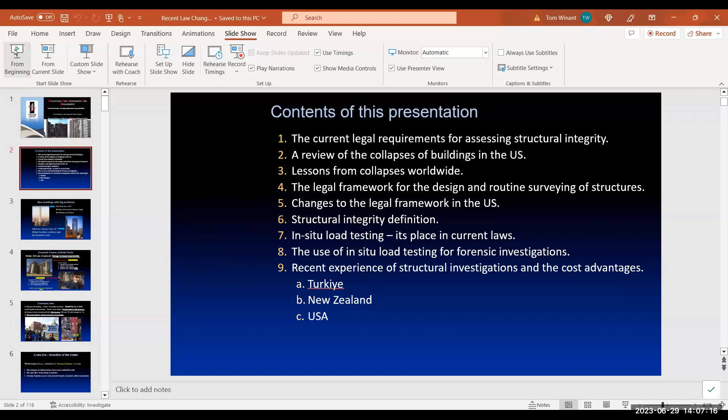So anyway, that's the pretext of what we're about to speak here. So the contents of this are the legal requirements for assessing structural integrity - structural integrity being the operative word that has just entered our discussion around the country, but it's always been in ASCE 7. Review of the collapse of buildings in the US, which just recently happened. Lessons from collapses worldwide. The legal framework, changes to the legal framework, structural integrity definition, in situ load testing, and the use of in situ load testing for forensic investigations, and the recent experience of structural investigations. So we've got a lot of slides to cover, and I'm going to try to move quickly through the first 20 to give it to Dr. Geary, and hopefully we can get through them all, because there's a lot here with examples at the end. So I hope you all tune in.

So some of the new buildings that have big problems - these are two that you're all probably familiar with. 432 Park is a building in New York City, and it was not commissioned. All of these buildings, if they had a load test, we'd understand how they perform dynamically, but it has some major structural problems that led to flooding on 8 floors. So this is the type of reason why doing this sort of commissioning and this load test when a building is first built makes a lot of sense. It's part of a big lawsuit now, and it's going to be very expensive for the engineer, for everybody.

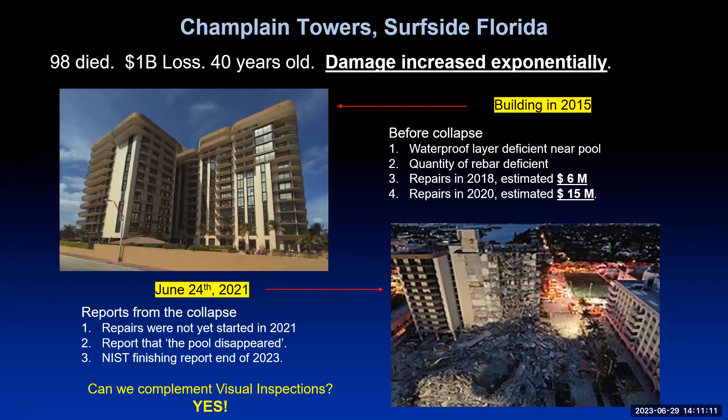Understanding its risk is the first step. But right now, we're not doing this. And for this building, I think we could have helped with that. These methods are definitely going to be able to help with understanding risk and mitigating it.

Another recent failure, a 100-year-old building in Iowa, 3 people died, 1 woman lost both legs, a tragedy. Everybody is homeless now who lived in that building. New York City has 200,000 to 300,000 5-story walk-ups similar to this, certainly in design, maybe not as big, but they have them all over the place.

This one had significant deterioration. It was bought in 2019, had failing bricks. They painted it to make it look better. Well, isn't that familiar? That doesn't fix it, it just paints over it. So we're hiding problems, we're not understanding them.

They had a wind event in 2020 in Iowa. Very strange, right? So they had a derecho with maximum winds of 126 miles an hour, 70 miles an hour on average for a whole hour. So it was weak to begin with, and then it started showing real signs of damage.

So this is a wake-up call in that when you have a structure that's compromised, whether it's in Iowa or down in Florida, if you're seeing signs of damage, you can measure this and then you can track it. Right now, we're guessing as a society, and that's not a good idea.

So now we have a change in law. Structural integrity became the operative words. So what that definition is, Dr. Giri is going to go into, but it includes lateral capacity and making sure it's tied together. Understanding what that capacity is and verifying the mode shapes gives an understanding of this.

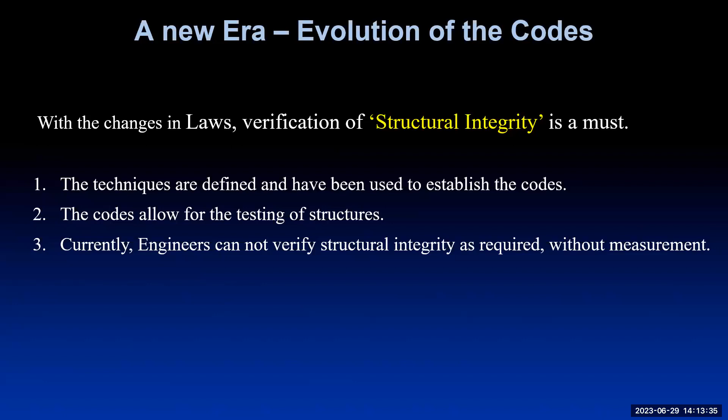Most buildings have all of the structural elements covered. So now an engineer's got to walk through that. He's got to stamp a letter, or a report that says, I have verified this and it has structural integrity. And that is a big leap from doing a visual inspection. And the fact that the law has now focused on this in multiple states and federally, it is a change in the standard of care.

So the Florida law was the original version of this. Vertical elements of the lateral force resisting system have suffered damage such that the lateral load carrying capacity of any story, in any horizontal direction, has been reduced by more than 33%. So this is a quantification of how much damage is allowable.

And so now, don't you need to measure it? The capacity of any vertical component reduced by 20% from its preceding, pre-damaged condition.

So we have these metrics that give you an idea of why you need to measure them. They give a definition of substantial damage: a condition where vertical elements of the lateral force resisting system have suffered damage such that the lateral load carrying capacity in any story in any horizontal direction has been reduced by 33%, and the capacity in any vertical component has been reduced by more than 20% from its pre-damage condition, with remaining capacity of such affected elements with respect to all dead loads and live loads less than 75% of that required by the code.

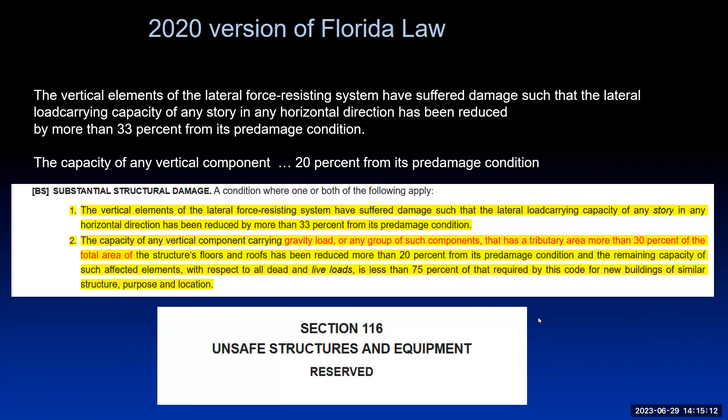So we have performance metrics here, and performance metrics are not uncommon, and that's exactly what we need to understand, that there's a way to measure performance.

So a year of legal changes. 2023 has looked for the verification of structural integrity. The Florida law is actually Senate Bill 154, signed on the 13th of June. New Jersey has Senate Bill 2760. Jersey City passed an ordinance. Westchester County was working on language. And this is really an important one: Freddie Mac and Fannie Mae put guidelines in referencing structural integrity.

So it's in chapter 1 of the code. It's now in these different states and their legal definitions, and now it's done on a federal level. It really is a national issue.

So Senate Bill 154, signed June 13th, provides for inspection guidelines and implementation. They did a study trying to support how to implement this, and they talked about non-destructive testing. The draft report references the method we're talking about here as a way to do a load test on a structure to verify structural integrity. So it's now in the process.

They also have reserves for repairs, and that's really important. Now people have money to pay for things like testing and repairs. Over the last 40 years, as this was evolving, a lot of community boards could opt out of putting money into reserve. Now they didn't have money to fix things and they made bad decisions, so they're dealing with a game of catch up, and they're seeing exponential degradation.

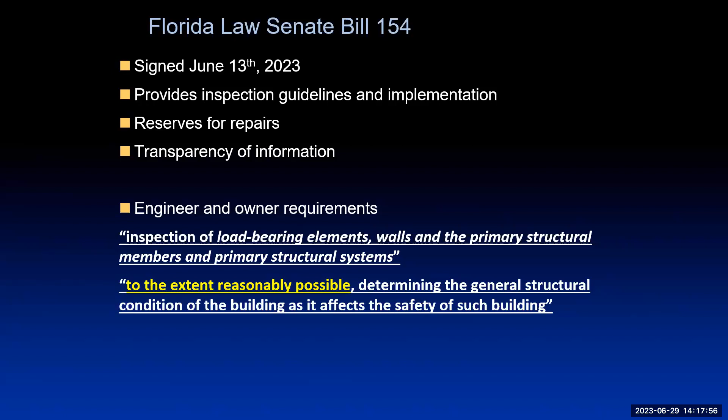These are items number 1 and 2 in the law as it comes to the inspection process. So we need to understand the structural system, and this puts the onus right on the engineer, and the responsibility on the owner to have this done effectively. So they really do need to take this seriously.

So the legislature finds this is about structural integrity. The legislature finds that maintaining the structural integrity of the building throughout its service life is of paramount importance, in order to ensure that buildings are structurally sound so as to not pose a threat to the public health, safety, and welfare.

And then they have a statewide inspection program, and this is for condominiums 3 stories and above. They've defined the terms, they've defined the standards, and they've also defined the documents, codes and standards to use. So it's pretty much defined, and again, it's a change in the standard of care: a structural inspection of a building, including inspection of load-bearing elements, walls, and primary structural members and primary structural system, and to the extent reasonably possible, determining the general structural condition.

And then after the primary inspection, there's a phase 2 inspection. That phase 2 inspection means if something is unsatisfactory, if you have visible damage, then you have to go to a deeper dive. This is why they started really honing in on non-destructive testing, because you've got to quantify how things are degrading and you've got to quantify performance.

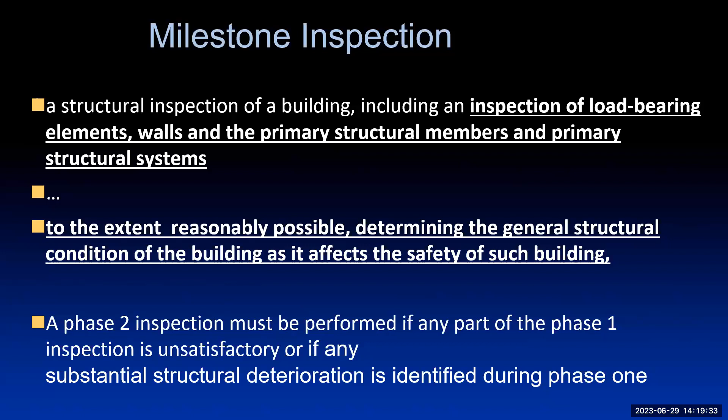So what is substantial structural deterioration? Substantial structural distress or substantial structural weakness that negatively affects a building's general structural condition and integrity.

In the lens from which we use, if you can measure it accurately, you understand how the building's performing. If you know what the code expects, then you know what it should be doing. And if you can track its degradation, you'll meet the intent of this. So this can all be done in a day.

It does not include surface imperfections such as cracks, distortions, sagging, deflections, misalignment, leaks.

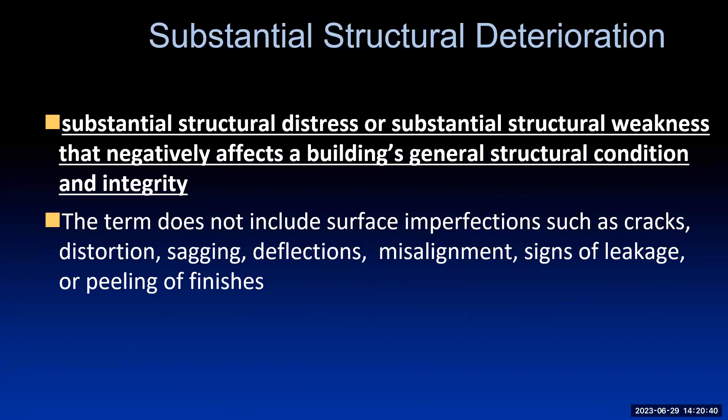Understanding structural distress can be done much more effectively with objective measurements than trying to assess it when a majority of it is covered up, and that includes the exterior. Most of them are stucco buildings. The concrete is covered with a thick layer of either paint or a stucco. So to be able to assess these effectively is important.

The phase 2 inspection report should indicate the manner and type of inspection, forming the basis for the report. Right now, it's mostly visual. Identify any substantial structural deterioration within a reasonable professional probability based on the scope of the inspection, describe the extent of such deterioration, and identify any recommended repairs.

State whether unsafe or dangerous conditions, as those terms are defined in the Florida Building Code, were observed. So this is an interesting one. If you can't see it, doesn't mean it's not there. So what's a reasonable thing to do? And you can't put disclaimers that I couldn't see it, so it wasn't there.

You're now responsible for verifying the structural function, the shear walls, and the structural connections of this. And they could be in distress and you wouldn't know it. So there's an inherent risk to the engineering community with this.

Recommend any remedial or preventative repairs for any items that are damaged but are not substantial structural deterioration. Identify and describe items requiring further inspection. So there's a series of things to do, and load testing actually gives you quite a lot of clearance to say that we've done everything reasonably possible.

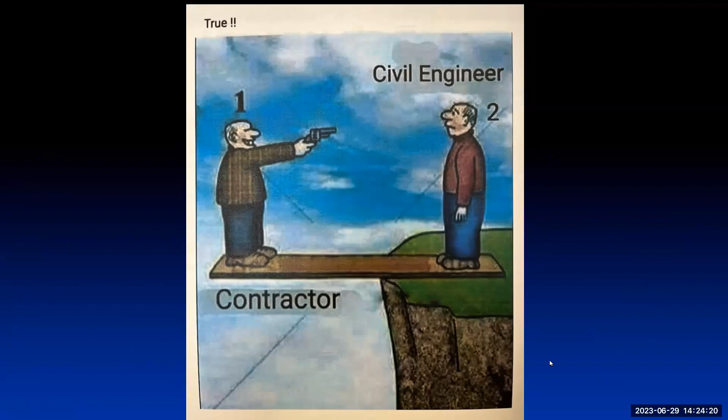Yep, stop sharing then, Tom. Okay. Thank you. And I will share my screen and we will go back to that same slide. And I'll take it from there. I think. Yeah.

Okay, so Tom has talked about a number of things in the definitions, particularly in that new Florida Code of Practice. Now, it's interesting to have a look at that and see what the exact legal state is, because they've been tinkering with their laws. As Tom pointed out, 2 years ago, they had a law which called up ASCE 7 as a standard which supported what they were saying. And it does. It's a good document. What they did find after the Champlain collapse was that it didn't cover the sorts of things that had led to the collapse.

And now we're actually finding that we've got a number of other things which are going on. So it was necessary for them to define what they were going to do, how often a structure could be inspected, how it was going to be inspected, and what the items were that a surveyor, an inspector, would actually be looking at.

We really want to bring to you the fact that structural integrity has become incredibly important, because you are now required to assess structural integrity. And how do you do that? Well, I'll be talking to you about some details, but the first thing is define it.

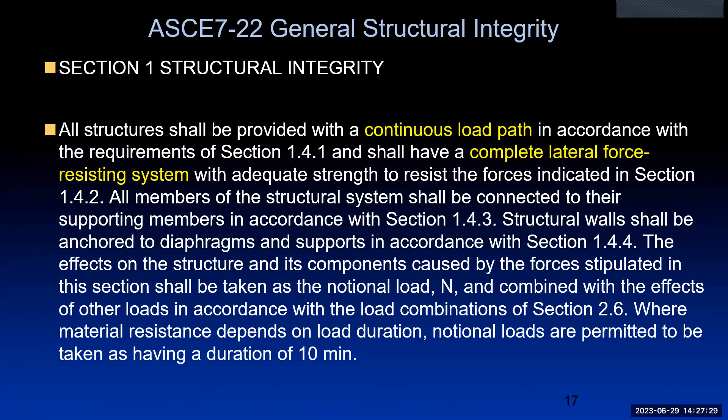And then they talk in a little bit more detail. You can read the detail at your leisure there.

Now, the important thing about structural integrity, though, is that it's been around for a long time. It's been called different names at times. In fact, way back in the United Kingdom, it was called structural adequacy. Why? Well, because of a collapse that there was in the UK, Ronan Point.

And I'll be talking in some detail about that, not just because it's an interesting subject, but because it is quoted in the International Building Code in the US, used in the US right now. It's right up there at the front of ASCE 7, and it provides details.

So essentially, it's the ability of an entire structure and its elements to carry imposed loads without distress. Now, there's something that we have to bear in mind as well: what is distress? And then it becomes a little bit more complex.

So on the big picture of loading, the imposed loads are those expected in the design process. The expected loads are risk-based.

Now, I have sat on code committees in Hong Kong, Australia, Brazil, and given information to Japan and the United States about what to expect.

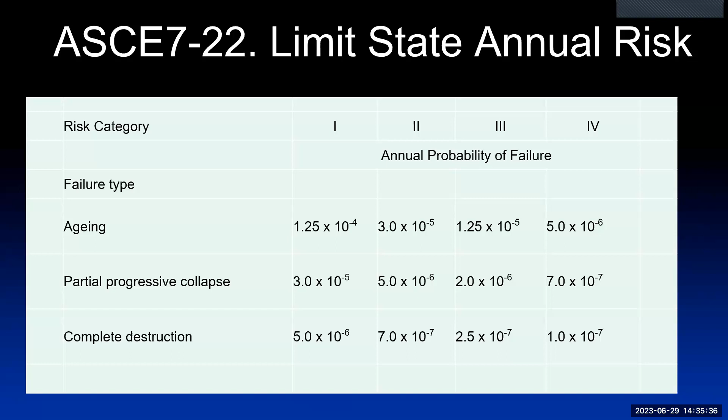That's what the medical profession calls a Six Sigma criterion. So in other words, for these types of failure, we're taking them into account in structural and civil engineering as well. But that does mean there's a secondary part to the design in which we must not just take the forces which are going to impinge on the structure, but we must look at the unexpected as well and reduce the probability of failure in those cases. I'll be saying more about this when I come back to talk about Ronan Point particularly.

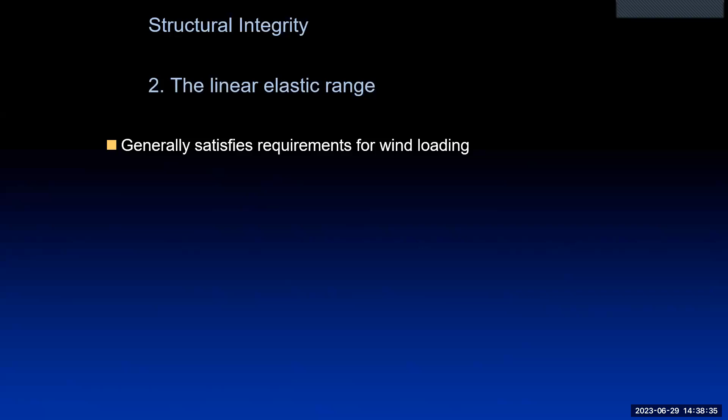The next is the linear elastic range, and generally speaking, we use that for wind loading. We use Newton's second law of motion: force equals mass times acceleration. This is the basis still of all our calculations that go into the design of structures. And since we're on the subject, in situ load tests belong in the same category. Force equals mass times acceleration is what drives it.

Sir Isaac Newton, in 1660, the Royal Society was formed amongst a number of people. Newton was one of the early fellows. You cannot just apply to join the Royal Society; you have to be invited. You have to have been right at the very top of your profession to be invited in the very first place. So a small group of people got together, and all of the things that we just assume are normal for us derived from people who were members of the Royal Society right at the start.

The basic saying of the Royal Society is, don't just take anybody's word for it. You need to verify using the scientific method about what's going on. And in situ load testing applies all these principles. It takes Newton's second law of motion, Young's modulus, Hooke's law, and puts it together with a verification which is scientifically okay.

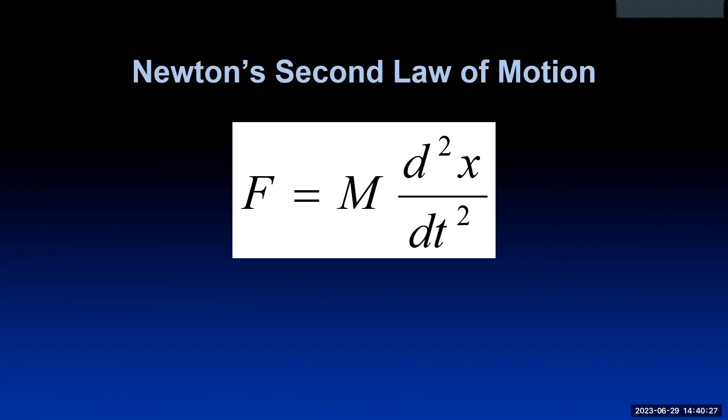So this is what we're talking about. If we look at a stress strain diagram, and extrapolate it to an entire structure, we have a force and a displacement. It's what stress and strain are, but on a very small amount, on individual elements. So we get an area which we call the linear elastic range, and we have a stiffness associated with that, which shows the ratio between displacement and force.

So if we're testing a structure, we measure displacement per unit force. Measuring force has always been a problem, but I'll show you how we get around that, and that in fact displacement per unit force is much easier to assess than the modal force. So we have this area where the stiffness is a constant until damage starts occurring.

This is pretty much the limit of wind design, although occasionally we get into some other areas here. And in seismic design, we go beyond the elastic limit and damage occurring in a structure, so that we don't do too much damage. It doesn't fall down, doesn't lose stiffness altogether. So structural integrity - we are interested in both ductility and earthquake response. And it's common practice in earthquake engineering to take this into account.

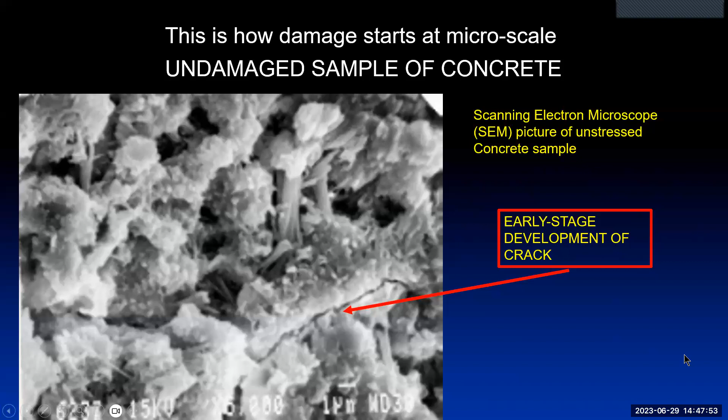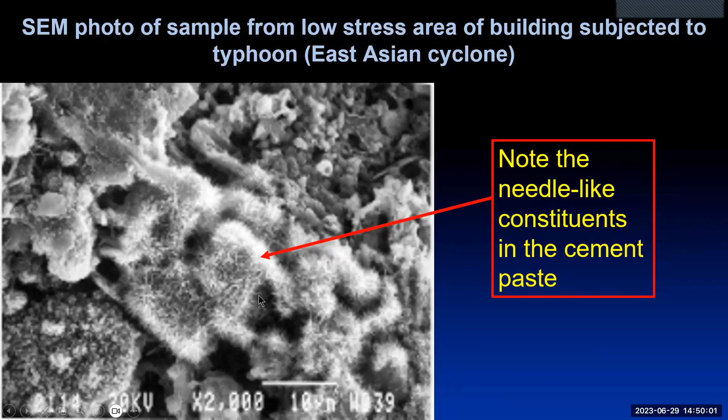And I'll come back to that with some more information. Now, the aging process - what causes damage in the first place? Well, I want to go back to our scanning electron microscope. Here we've looked at two samples, this one and one to follow. This one is taken from a low stress area of a building subjected to a typhoon - the East Asian approach to cyclones occurring, the same meteorological event, but somewhat different. Now you see in the cement paste there are different chemicals which form different areas inside the material here, and you can see needle-like elements inside the paste.

Taken from a high stress area, we find this. Now remember, it's come from the same building. They took their cement from the same supplier, and they were at slightly different times, but essentially they were the same category of cement which was put in. And since these measurements were made probably 10 years after the building was put up, there's no real difference because of the timing of pouring the concrete in the first place. So the needles are broken, and when we actually looked at the chemical constitution of this cement paste, we found enormous differences between the two. So in other words, damage occurs not just because of cracking developing, but also right the way up to small chemical changes within the material.

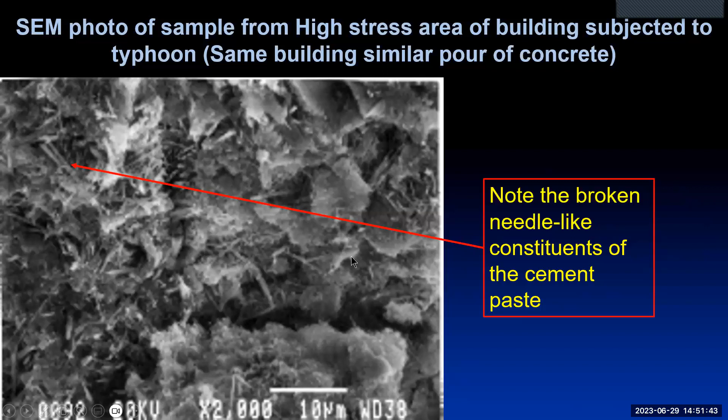Now, we were particularly interested in concrete at that time in Hong Kong, which is where it happened. We were also interested in steel, and laboratory experiments showed that there are similar changes in steel. Not the same, but similar - that in fact the loss of stiffness, the change of materials inside the steel were very similar to what occurs in cement.

Now, we've got a problem at the moment. Buildings are falling down. We have aging infrastructure inside the United States. How did it start? What was going on? Well, it started with this, Ronan Point in England. This was a 22-story building, and there was a gas explosion up on the 18th floor.

It blew the roof off of that area. It went up, took down the roof above it, and then fell downwards. And it took down the floors. As the loading increased, as a floor and a ceiling fell down on the floor below, it couldn't withstand it, and it kept on going down.

So this was called a large panel type of construction. It was based on a Larsen-Nielsen design, which came from Scandinavia. And what this did was to say, we can put these panels together. Now, the integrity of the building depended on each of these individual panels being well connected together. So it was a low-cost type of construction at a time when a lot of construction had to go on quickly. Originally, the Larsen-Nielsen system was only allowed for buildings which were 5 stories or less.

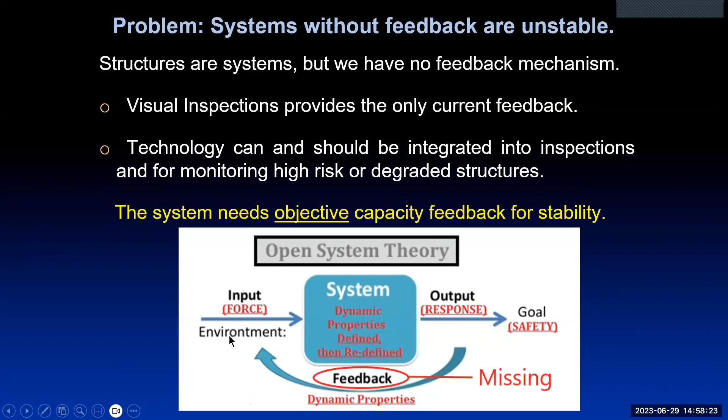First, you have an input—for us, it's a force. The system is a structure, and the output is the response. The goal is safety. We want to look at what the structure really does and feed it back into what those forces are going to be. In practice, if we don't have that, then what we have is an unstable system.

So now we are told we need to verify structural integrity. As Tom has said to you, there's a paradigm shift. In 2022, after the Champlain collapse, structural integrity laws were initiated all over the place. We've been involved with some of that, talking to people discussing changes to laws in Florida. We've also talked in New Jersey, and other places as well.

Freddie Mac and Fannie Mae have added language on structural integrity to their requirements about insurance. ASCE 11-99 is actually adopted as a standard, and it defines how load tests can be conducted. So for our system, they're actually talking about the way to get the information that you can feed back.

Then there's the IBC and ASCE 7, developed through the 2010, 2016, and 2022 editions, which mention that you should be measuring what's going on. Well, of course, the standard is that we go in and have a look and see what we think has happened. But if you look, you'll find everything in the codes and standards that tells us what to expect. First, there's a requirement for minimum stiffness for both seismic and wind design—how? Well, they tell us what the frequency is expected to be. You'll find that in the International Building Code and in ASCE 7. You'll find values of frequency which are most likely to occur.

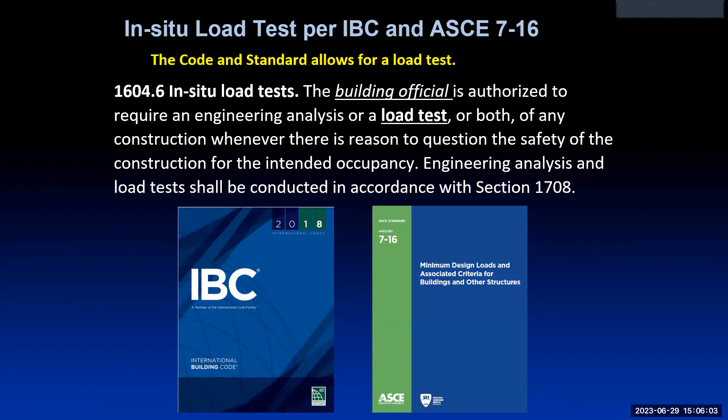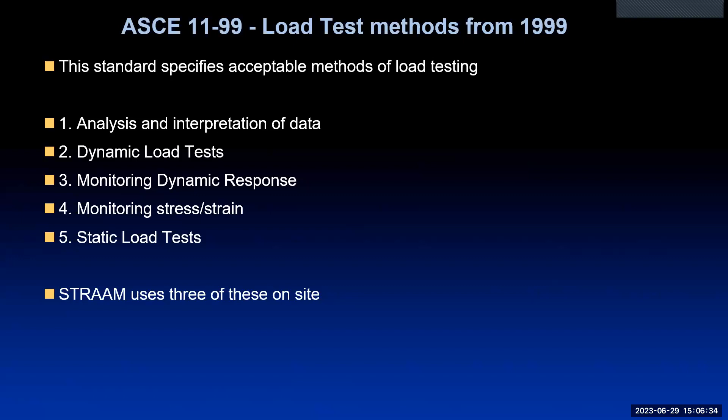So in other words, engineering analysis and load tests can be conducted, and they can be conducted quite easily. ASCE 11-99 - this is only 25 years ago - actually specifies acceptable methods of providing load testing: analysis and interpretation of data, dynamic load tests, monitoring the dynamic response, monitoring stress against strain, and static load tests. We actually use 3 of those. Now, standard 11-99 does say determining the dynamic response is an approved method.

Now, if we look at 11-99 and its 5 methods, we find: analysis and interpretation of data, limited by the amount and type of data recorded, can be very expensive. Dynamic load tests are mainly applicable to system buildings - in other words, if you've got a system which you're applying to a lot of different buildings, then you apply dynamic loading. Perhaps you have a vibrator system, but that's expensive and requires specially made equipment to apply exciting forces.

In the UK, at the time of Ronan Point, we actually created a vibrator system. It cost us about £500,000 to build, probably $1 million in today's money. We required a team of four on site for at least a week, anything up to two weeks, to get the information off. We've gone a long way since those days.

It's nearly half a century later, so we can monitor the dynamic response. In '99 they said it was not very applicable in identifying specific deterioration problems. Well, it's all changed within the last 10 years. You can now measure not only the dynamic parameters, but you can identify areas of a structure which have stiffness weaknesses. And it's cheap as well—no longer $1 million to do a test, it's now a few thousand dollars.

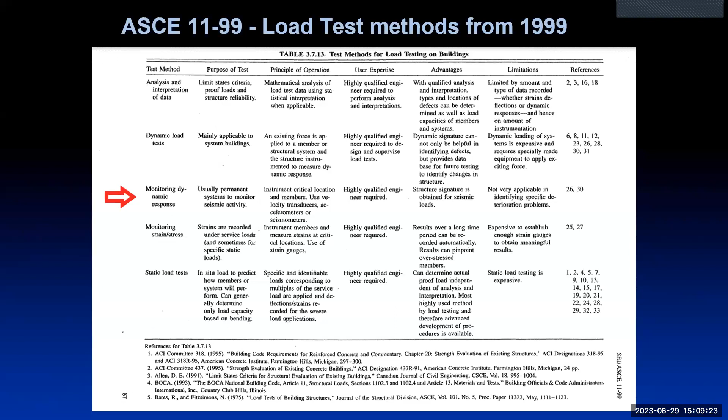Acoustic emission—if there is cracking, the cracks, when they're working, actually give off sound, which is a form of energy. Sounding techniques look for the same thing, so does ultrasonics. Ground penetrating radar looks at if something has gone wrong, if there's cracking, or if reinforcing has got a lot of rusting with it. Thermography has a problem because what you do there is look at heat, and if there's cracking which is working, that gives off heat as well—it's another form of degrading energy. In fact, if somebody has also got an oven working on the other side of an area you're particularly looking at, then thermography is a non-starter.

There's fiber optics—that's fine if at the time of design you put fiber optics inside all the way through the cement or inside the steel members. That's possible, but it becomes very, very expensive then. Imagery, you can use photographs to see if there is an excess of movement in some places, and the same with AR/VR imaging. You compare with what it looked like for a baseline structure, and you compare movement. Speckle pattern interferometry is a good way of doing that, but it's not as sensitive as you really need.

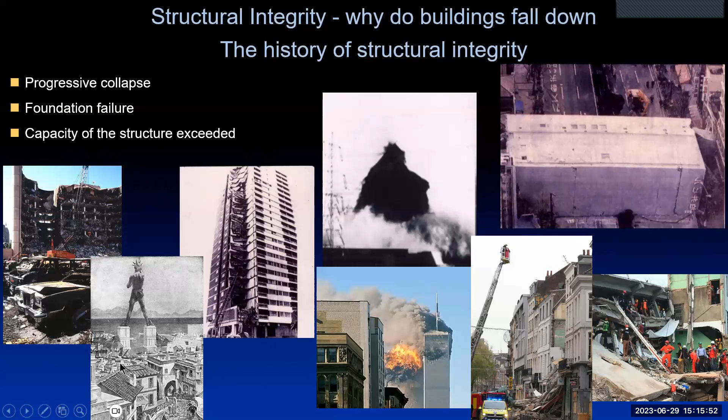The Colossus of Rhodes was something that fell down and lay there for 800 years before anybody actually pulled it away.

Now what I'd like to do now is to say, yes, there is some information here about the relationship between static and dynamic responses. And my computer has just frozen up because I pressed the wrong button.

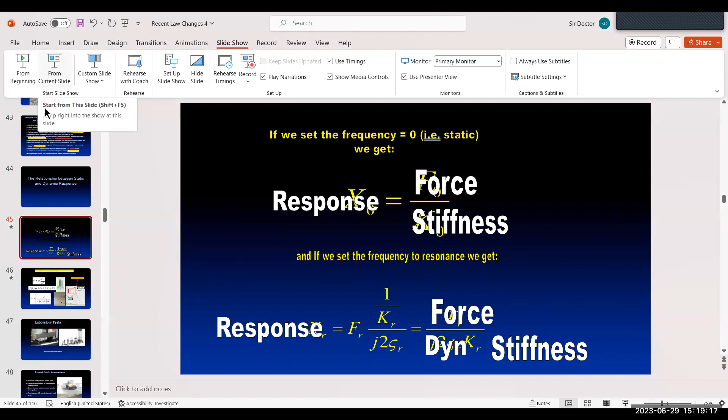I want to reference the fact that statics and dynamics are just two sides of the same coin. Because if we take those equations, Newton's second law and so on, and we apply them to our system, which is our structure, and we set the frequency to zero—in other words, statics—then what we get is that the response is the force divided by the stiffness.

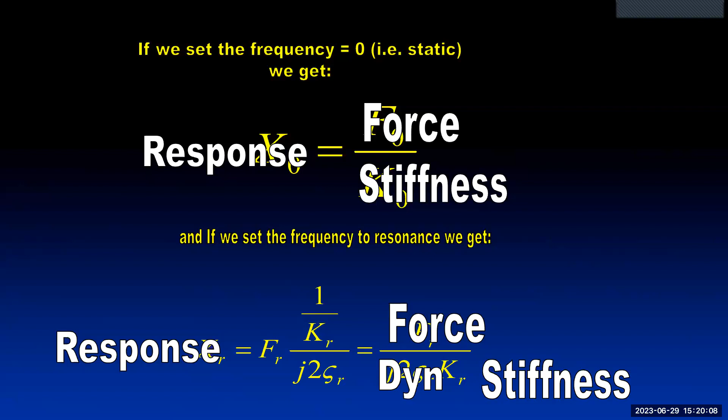So in other words, we take these equations, which are just Newton's second law, we put them into this, and we measure the dynamic response, because we can extrapolate back all the way down to what we do in design.

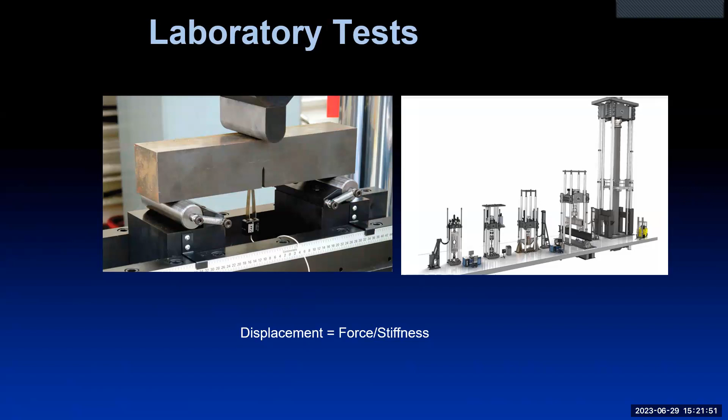And of course, what we do in universities is we do laboratory tests in which we look at displacement, and we have the force applied divided by stiffness at various different forces, various different sizes. And in fact, we've become so used to them that we expect the whole world to be organized like that.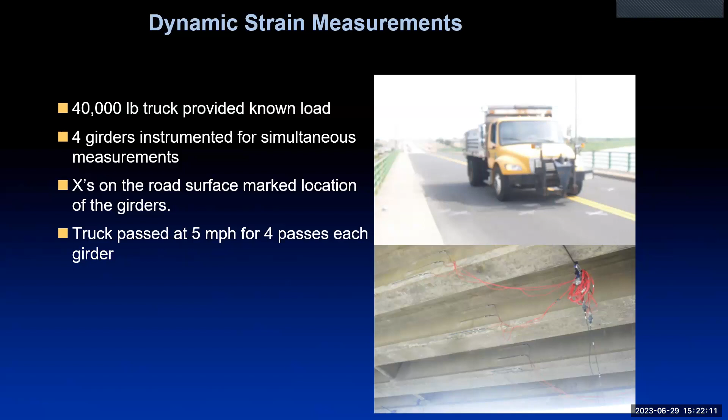It's not. We can put loads onto a structure, bridges especially. In this particular case, we loaded up a truck and moved it slowly, passing over a bridge to test whether the structure was okay or not. And we got out of it raw data which show us the stresses induced in the bridge.

So that was particularly useful. We showed that you could actually roll that truck over the bridge at a low speed. If you got too fast, then it wasn't the same. But in practice, you could run it at slow speed and find out what the strain and thereby the stress was in each particular case. Came out very nicely as well.

Statics is a special case of dynamics, but we've got to be aware of the resonances because they're excited. They're always excited by natural actions like wind, wave, earthquake, and traffic as well. So if we go to a structure and we want to do a test which is based on the dynamics of the structure, we can do that so long as we can measure down to a very low amplitude. And we can, because technology has moved on.

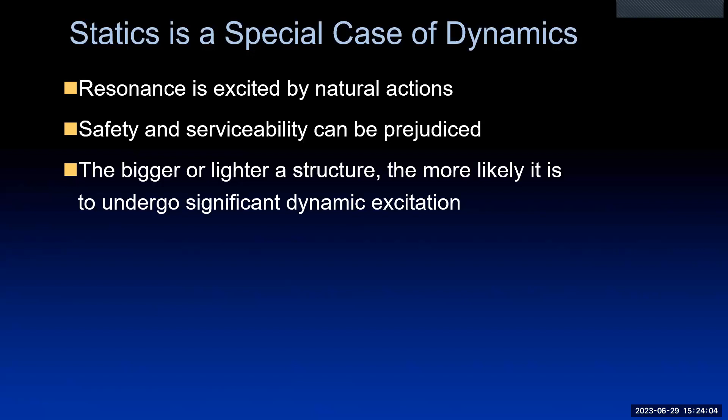So we just need to measure that we've got the dynamic magnification factor, and the dynamic magnification factor multiplied by the static response equals the dynamic response.

And if we actually say, okay, we are going to look at a building and we are going to test it, we really need something to test against. That can be what's expected in the code, or we can have a look at that structure when it's first put up and compare it later on.

And that's known as structural commissioning. It's a verification that a structure going up actually has the required strength and capacity that the design assumed. And that means that it's designed to resist what's in the standards that back up the codes of practice.

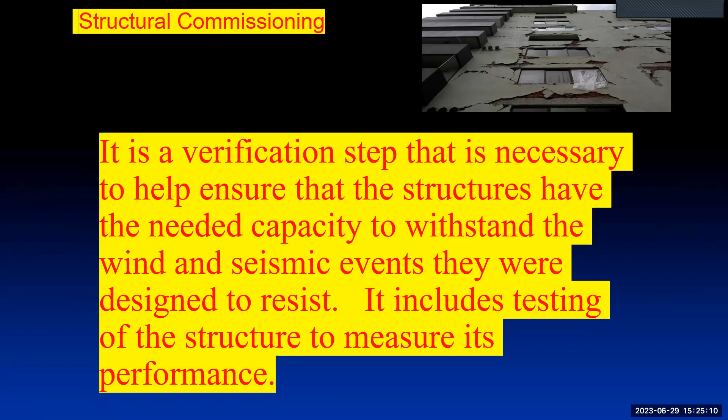And we can do that by measuring 5 parameters of a structure: frequency of resonance, displacement resulting from the force, mass and mass distribution in the structure, damping associated with the resonance, and the deflected form. The deflected form will tell us if there is a structural weakness somewhere.

And in fact, we can take those 16 methods that Florida will be considering up until the end of next year, and we can say 2 of them actually perform what you want to do. There is a dynamic analysis and in situ strength measurement, both through the dynamics.

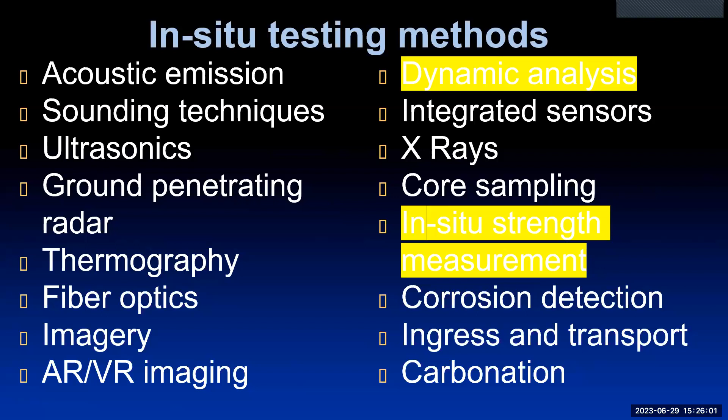So it's already allowed. Why aren't people using it? Because they're not familiar with it. They haven't come to the viewpoint as yet that it's cheap, it's quick, and it answers everything that you need to know. It'll happen because it's so obvious.

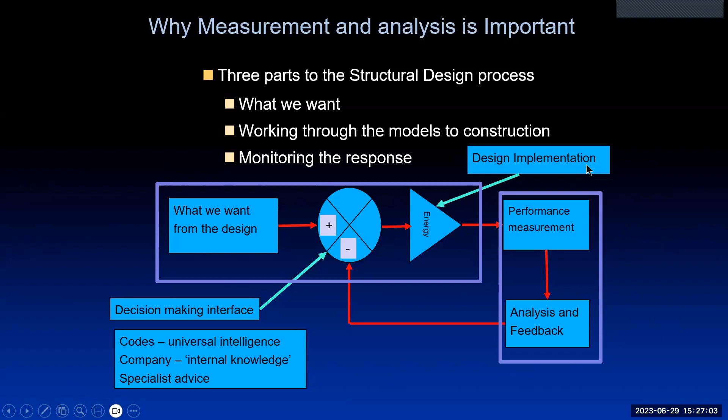So the systems approach, let me just go back to that for a moment, because I showed you this diagram, what we want and what we've got. So if we actually have analysis, then we have what's known in system theory as a decision-making interface. So we have what we want from the design, and we feed back information and put it into that, and we adjust our codes. We design, we check our design, modify it as a result, and if we don't have feedback, system theory says that the entire system is unconditionally unstable.

So we need feedback. How do we do it? We do it like this.

We put a measurement onto the roof of a structure, and then we measure down stairwells. We leave a reference accelerometer at the top, and then take others to various different places. So for a 5-story building, it takes us 3 to 6 hours to do that. A first pass, 1 to 2 hours, and the methodology is non-invasive, non-destructive, accurate, and repeatable.

The accelerometers are just about the best that there is anywhere in the world, and we've developed our own what we call a structural cardiogram, which also has low noise. Now put these two things together and we can measure down to the wavelength of visible light.

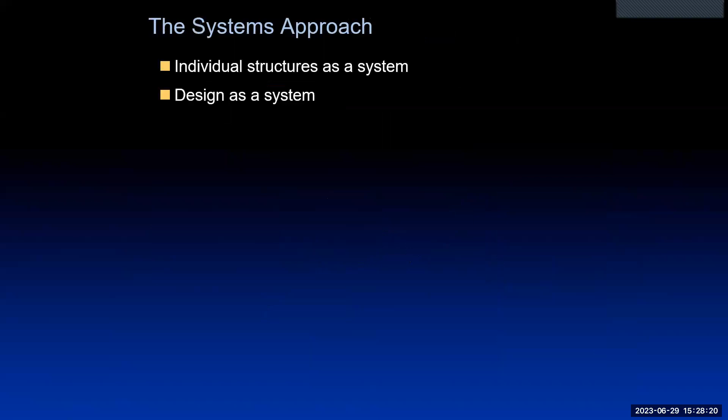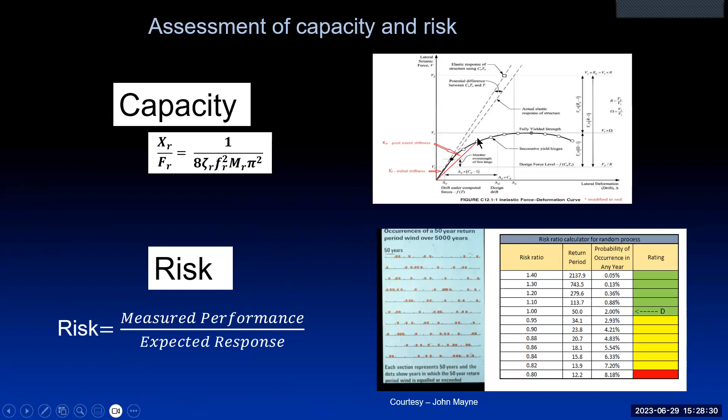Why is that important? Because if we are down here measuring, we can extrapolate all the way up into another regime that we're interested in. So long as our instrumentation has low enough noise that we're able to measure very small vibrations, then we're able to extrapolate upwards from there.

So why do engineers need to perform a baseline? To measure frequency and damping, categorize the building, locate weaknesses, and adjust the methods as needed.

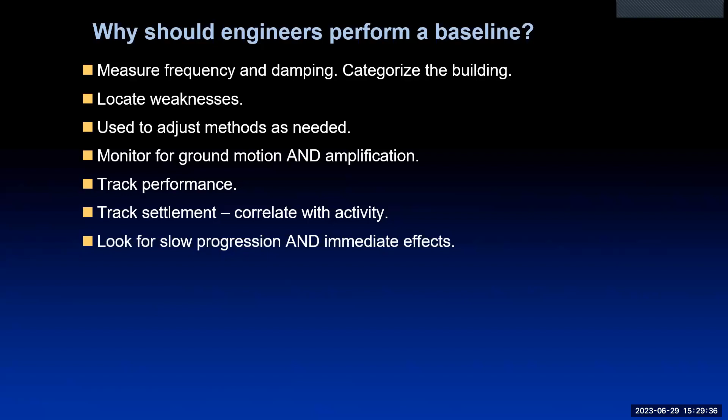You can also measure for ground motion and amplification, and to see if there are voids underneath the ground. You can track performance over time and track settlement as well, because an accelerometer uses gravity as its reference point, which means that if it tilts over sideways, it gives you not only the acceleration signal but also the tilt signal. So if you use both of those, you can tell if a structure is settling in some way, and see slow progression and immediate effects occurring.

So there, we measure displacement per unit force simply by using Newton's second law of motion. And we look at what that K value is, the ratio of displacement to force for the entire structure.

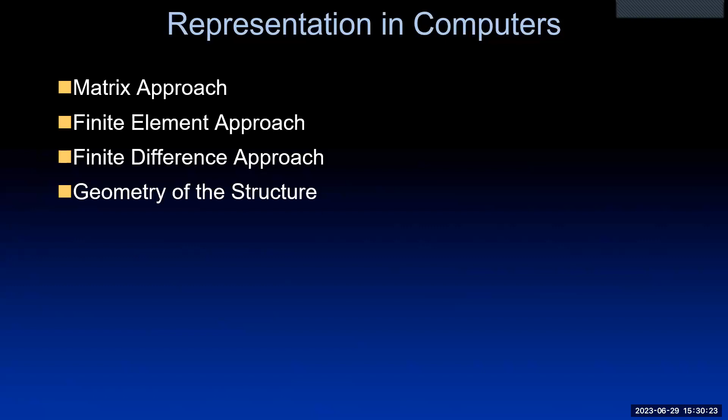Now, let us compare what happens in design. We have representation of a structure in computers. We have a matrix approach, the finite element approach, finite differences, and we can look at the geometry of the structure. Finite elements have become the most popular these days.

And what we actually do is we take this well-known equation—thank you, Mr. Newton, once again—and we apply it at various different points to a structure. So we have individual element stiffnesses, we have individual masses, and we simply say mass times acceleration plus displacement times stiffness equals the force. We've balanced there.

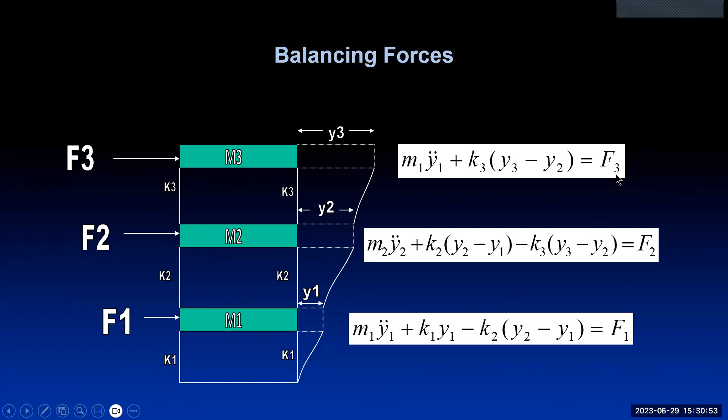We put all these together and we actually have a matrix equation. So we've got mass, acceleration, stiffness, displacement, and force, and there are matrices which occur as a result. You put those into a computer program and it is easy to find what Y is—that is the displacement at any point in the structure.

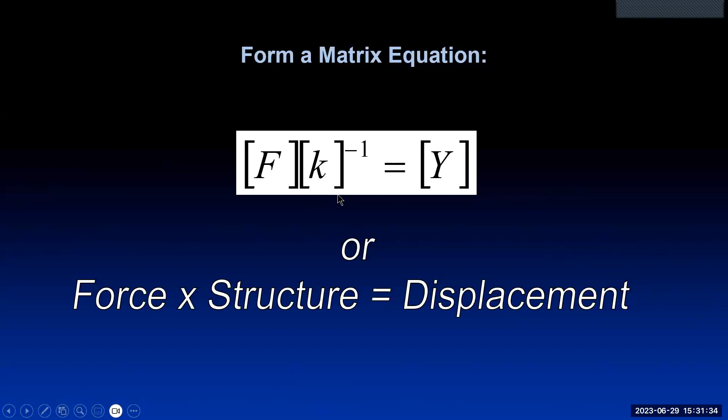So once again, we're facing the same sort of thing: force times a representation of the structure equals the displacement. F divided by stiffness equals displacement. Simple, isn't it?

So there are identifications that we can do looking at the dynamic parameters. If we're actually having a model, it is not a digital twin of the structure, because the person who's designing has before them a difficulty in deciding, for instance, how the joints are connected together, whether there are some additions to the stiffness and the mass from facade panels, from glass plating, from so-called non-structural elements in the structure. All of them have some sort of effect on the behavior of the structure.

So what is needed is that a digital twin can only become a digital twin if it's calibrated—if you make measurements and feed them back into the model. Now, you can't do that at the design stage, of course. What you need to do is put the structure up and then check it to make sure that it was the same as was intended. If it's not, there are things that can be done about it.

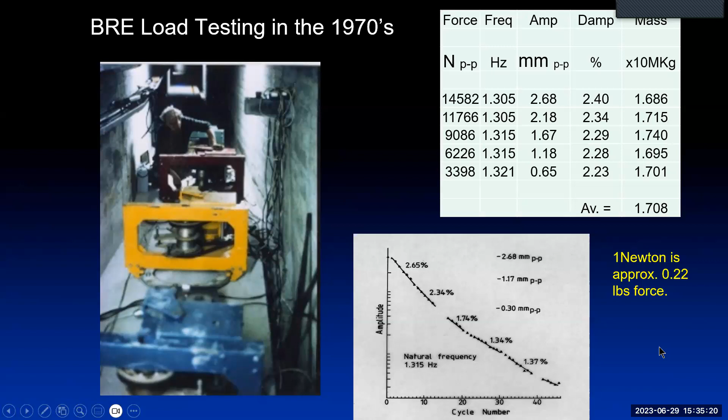So just in case you were wondering, and it'll be in your notes, a Newton is approximately 0.22 pounds force.

So there is now a way, not of shaking a building, but of measuring the response of the structure to ambient excitation. And ambient excitation allows us to look at a structure for longer. This is something which has confounded earthquake engineers for a long time, because an earthquake doesn't last long enough for you to use all of the techniques available.

What we do now is to say, okay, we can take what's known as a random decrement signature. We don't need stationarity, we don't need long-term data, and we make measurements. This down here on the right is a Randec signature of a structure. There is damping against the amplitude of response. Every single point is a different amplitude for a single mode of vibration.

And what that shows is that there is a value of damping which it will aim at. If you go over a large range of displacements, what you find is that there is a three-part curve in the damping: a low amplitude plateau, a rise, and a high amplitude plateau. And all of these are defined in peer-reviewed published papers right now.

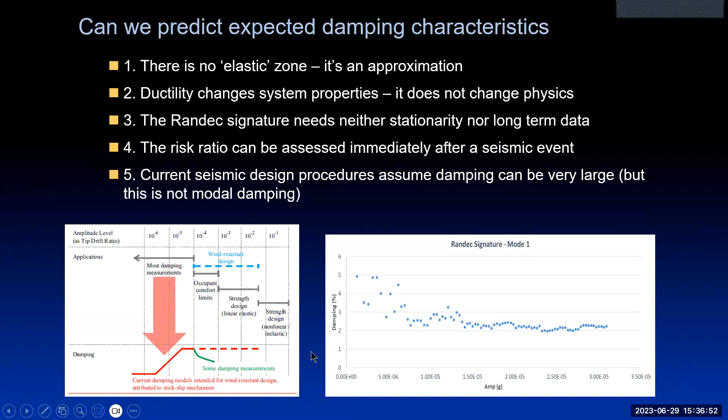So it is possible. They all depend on, instead of, as we're all used to, viscous damping, there is a test which was done by Tom Wyatt in the United Kingdom, and it showed that what you have is a whole series of elements which behave in a stick-slip way. Certainly, up to a certain amplitude, there is no movement, and then they come unstuck, dissipate energy and decrease.

When you put a very large number of these together, what you get is an overall characteristic which looks like that. In other words, it is equivalent viscous damping. So now we have a mechanism for damping, stick-slip methods, and we also have codes of practice which rely on being able to use viscous damping. Well, we've got equivalent viscous damping.

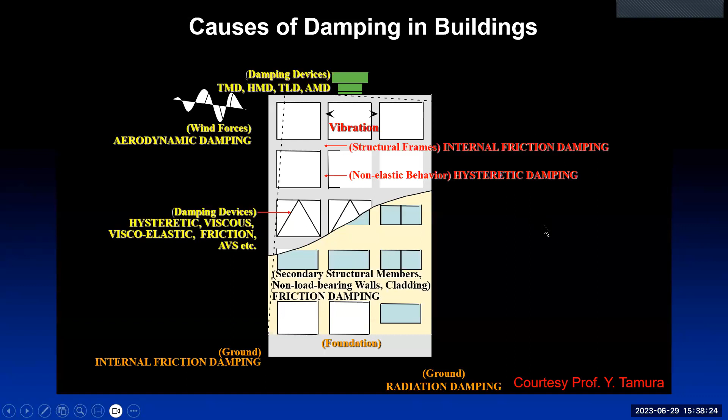And if you look at the history of it, then what you find is that that's what they talked about very early on. Damping occurs in various different places. You can have energy dissipating into the ground. You can have damping devices. You have aerodynamic damping devices on the building itself and the frames, and non-elastic behavior inside the structure. Put all of those together, and you have various different ways of looking at damping.

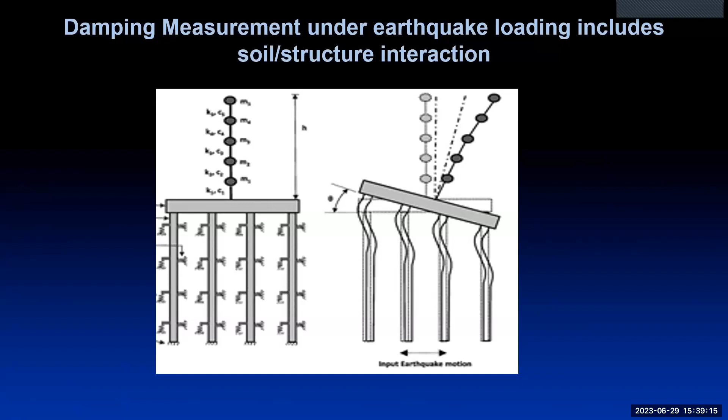I'll just take that, saying if we look at the response of the structure at low amplitude, then we measure the structure. If we measure at high amplitude, we measure the structure plus the energy dissipation in the ground. So low amplitude is good if we're talking about the structure and we want to know what the performance of the structure is, and if there's something changing in the structure itself.

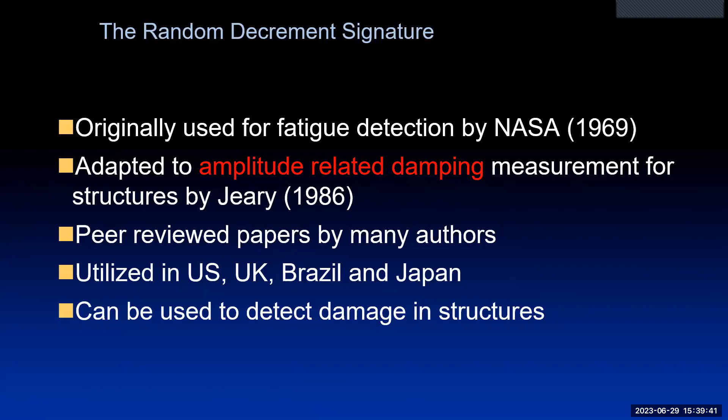So the random decrement signature was originally used for fatigue defect detection on the shuttle by NASA. We modified that for measurement on structures back in the mid-1980s, and it's now utilized in lots of different countries around the world. It can be used to detect damage in structures.

Every single point on that random decrement signature is actually a representation of a decay of oscillation with an envelope which has zeta, the damping ratio, in it. So we're able to look at that and produce something which will tell us what the damping is at different amplitudes. So we've got this three-part curve.

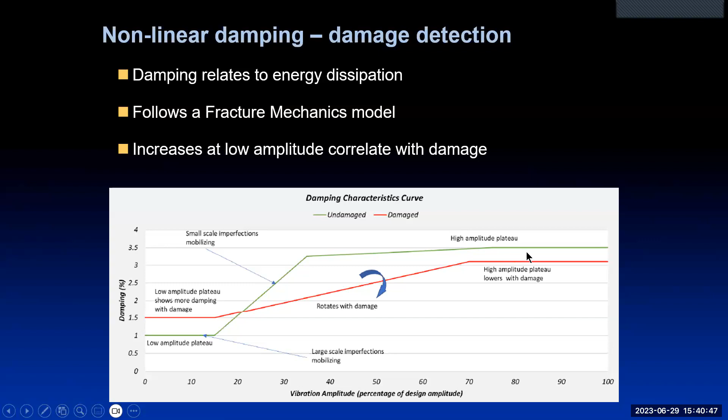When damage occurs, what happens? If we have large-scale imperfections, we get a rise or some sort of change in that low amplitude plateau. The rise here is dependent on the small-scale imperfections, which I've shown you in the scanning electron microscope diagrams. So that rotates, showing that there is damage occurring inside the matrix of the structure. And then at the high amplitude plateau, there is less energy damping available for us, so the value comes down at very high amplitudes.

Now, to show that it actually works, take this site in New York City. In that wall was a very large crack, which was only discovered after a garage was taken down. We put accelerometers on either side of the crack and measured what was going on, and we looked at damping as well.

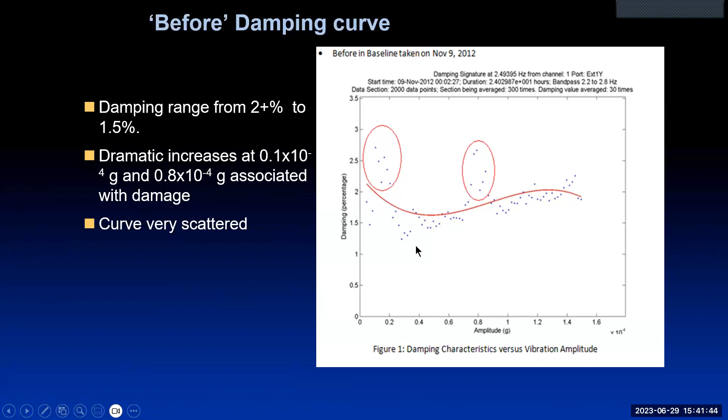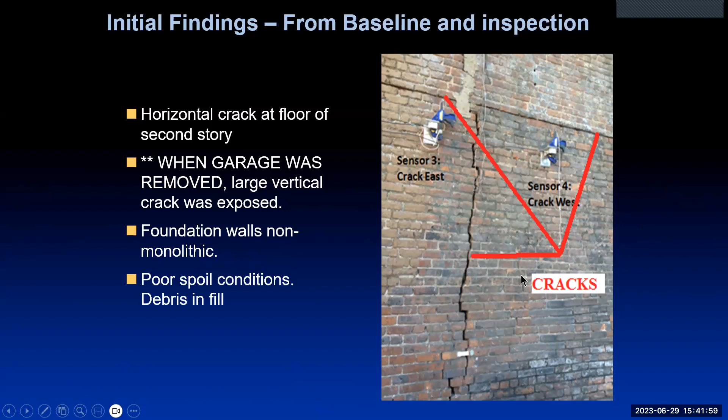Before they repaired that, this was the damping characteristic we had. We had a number of excursions in the damping characteristic with a general increase in the value. What this tells us, when we apply fracture mechanics, is that each of these excursions is associated with a crack length—in this case, this particular large crack and the interstory cracks. You can see them appearing in the structure in various places, and it appears in the damping characteristic.

After the repairs occurred, we had essentially our three-part curve. We had a lowering at the low amplitudes. We still hadn't got rid of everything in the very large crack, but the peak had disappeared for the other one. What we have then is a really good measure showing that we've actually taken care of the problem. This occurs quite often—this was another building which was repaired, and after the repairs we got the three-phase damping characteristic.

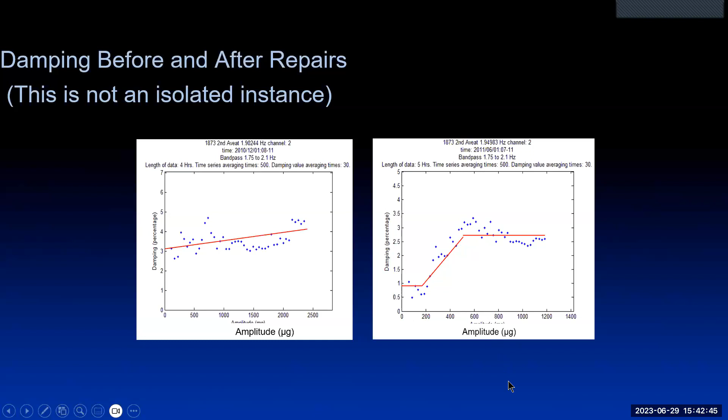And that's all from using this equation: X upon F is 1 upon 8 zeta frequency squared and mass. When we use that, what we find is that we've got a measure of the damping of the displacement per unit force. If we take measurements before and after an event at the same amplitude, then we've got a risk ratio, which I was talking to you about before.

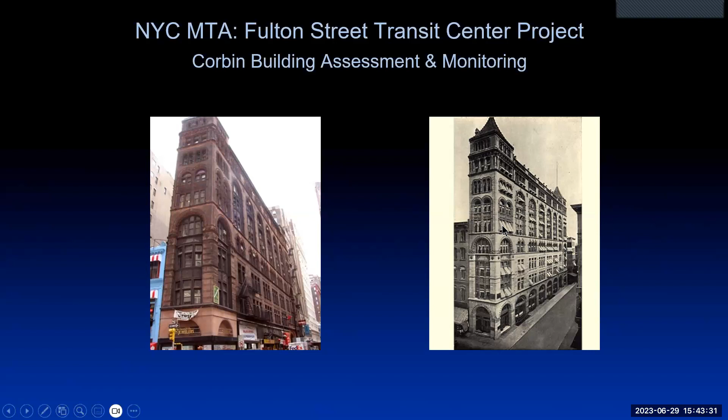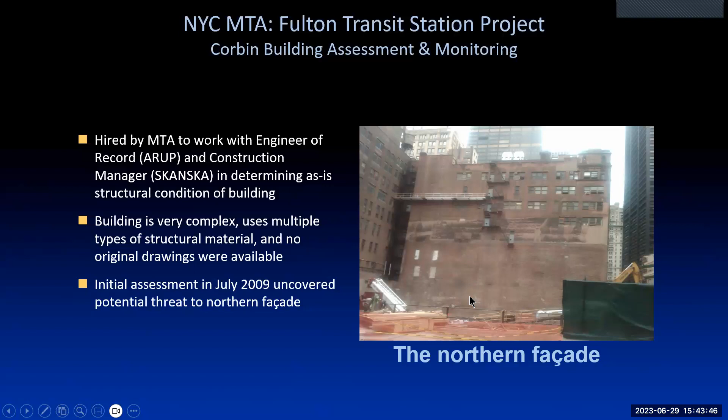Now I've got a few examples of in situ testing that we've done. This is the Fulton Street Transit Center in New York City. We tested this structure—they were building the transit area close to this 11-story brick wall. They were very worried about it because it's complex and old, and they didn't understand what the problem was.

In practice, we took measurements at an early stage when our accelerometers had quite a high noise floor. Two years later, we'd improved that somewhat as repairs had been done, and we found that the two main responses of the structure had separated—they'd both moved upwards in frequency. We actually calibrated the structure as well.

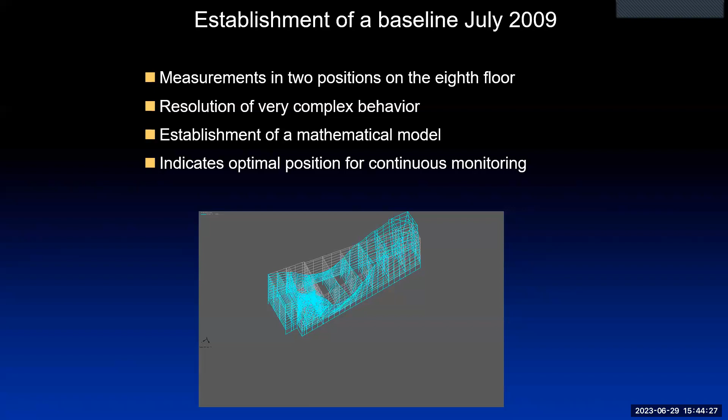We produced a finite element program, a reduced node finite element program, and looked at the response. There was only one way to get a response together, and that said the floors are only 2 inches thick. Well, that was silly—whoever heard of a 2-inch thick floor? Until you take the structure to pieces and find that the way they'd built them was they'd formed these arches, put soil over the top, and then a wooden floor over the top of that. The structural element was only 2 inches thick, which was a vindication.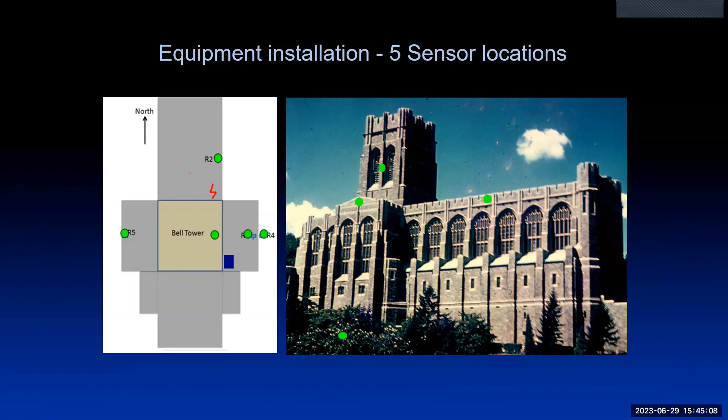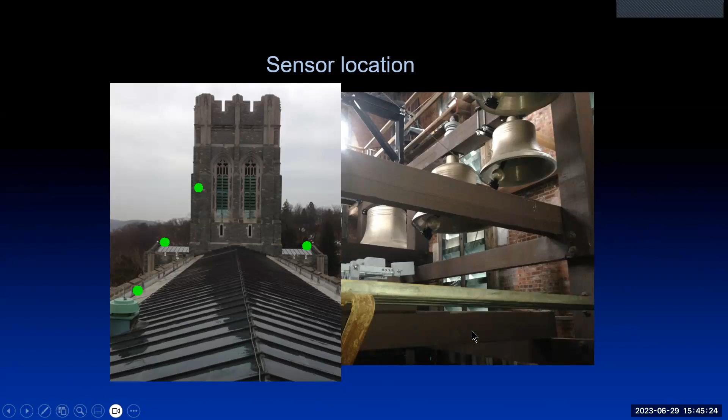So we also made measurements at West Point. That's looking from the roof back at the bell tower, and these green dots are places where we made measurements. There's attachment of accelerometers to an area of the structure, and there's a spectrum analysis showing the response.

You can see that our signal to noise ratio has got even better—it's pushing 10 to the minus 11 here, but you can see a dynamic magnification factor. That was a problem in that particular case, because when we looked at the response at the top of the tower itself, there was a magnification factor of around 10 times.

That 8507 document that I talked to you about before, which the Bureau of Mines produced and is used, tells you to measure vibration intensity at ground level or within 30 inches of it, and assumes that the maximum amplification you can get is 4. We had 10, and an occasional value of 12, coming out there as well.

So we told them what was going on, and they decided to alter the blasting regime so that the vibrations were not so large. That was lucky as well, because we said in this case you've got some new cracking, and we told them where it was going to be. They had a look and found new cracking, and realized that if they'd gone on with the blasting as it was, they would have had a collapse of the nave roof of that building.

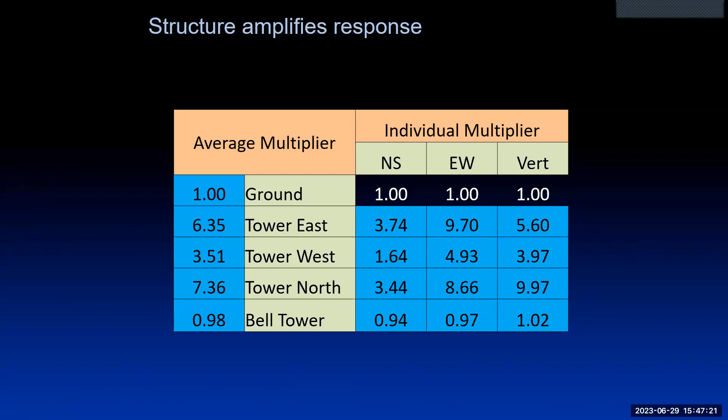They were grateful. This is 72nd Street, just by 2nd Avenue in New York City, where a subway was being built. Underneath, a new access down through an access tunnel was being built, so there were transfer girders to take the load of the building instead of directly down into the ground—through the transfer girder, transferring it, to make sure the building was safe.

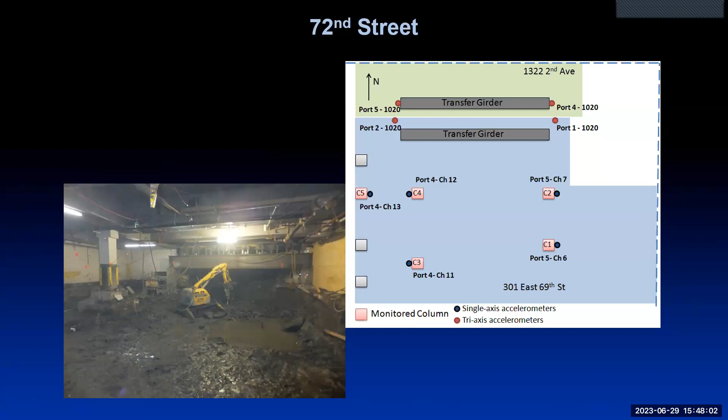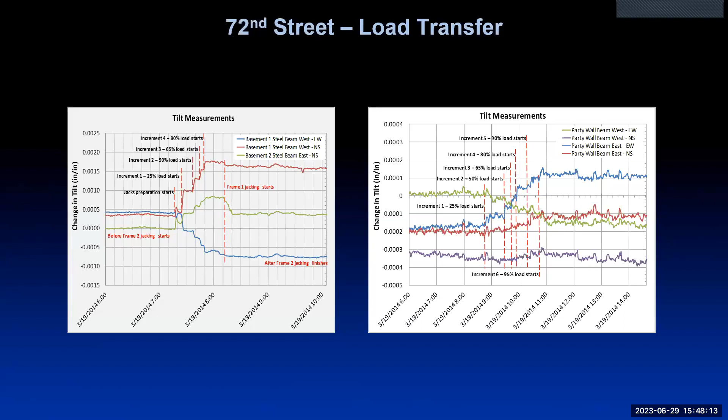Well, we monitored on the girders and on the ground and found this sort of thing. This is as the load was being transferred. We were able to convert these measurements to determine whether it was safe, and assure them that it was okay.

But this was the big thing: did the frequency of the building change? Not very much, by 0.01 cycles per second. But the damping changed enormously, from 1.2% to 0.9%. The reason for that is that the building was more monolithic. So damping itself became a measure of showing whether a structure is actually in good shape or not. It helps you understand it.

We also had a spectacular win in New Zealand. We're able, with any building, if we've got measurements going on, to transmit it over the internet. So anywhere in the world, we can sit down at a desk and look at what the response of the building is.

Wellington knew they had a problem after the Kaikoura earthquake, which was 7.8 magnitude. This is the South Island of New Zealand, and that's where Kaikoura occurred. Wellington is just over here. The aftershocks, similar to what was going on in Turkey, there were a lot of them, which gradually got closer and closer to Wellington.

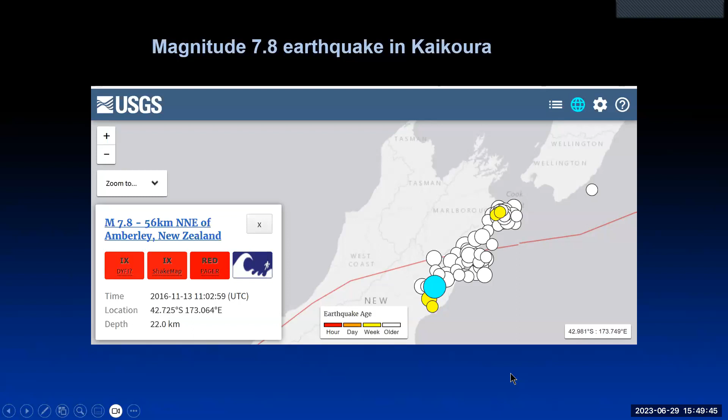Wellington got worried and asked us to take a look at 10 of their buildings. We didn't know it, but there was one amongst them that they were particularly interested in. It was this one. It had been through 3 earthquakes, and Kaikoura was a big one.

So we made measurements and monitored an area in which there was a reduction in stiffness. We looked at what the frequency was, what the damping was, and went back to them and said, you have got a problem here. Not only that, but we can identify where that problem is. It's in this area circled here on this diagram.

So they took the facade panels off and found there was a broken structural member. Now, before this, 2 engineers had gone in and done a visual inspection. One of them said it's about 80% of its old capacity, and the other said it's about 30%. Two engineers, both using the same rationale for working out whether the building was okay.

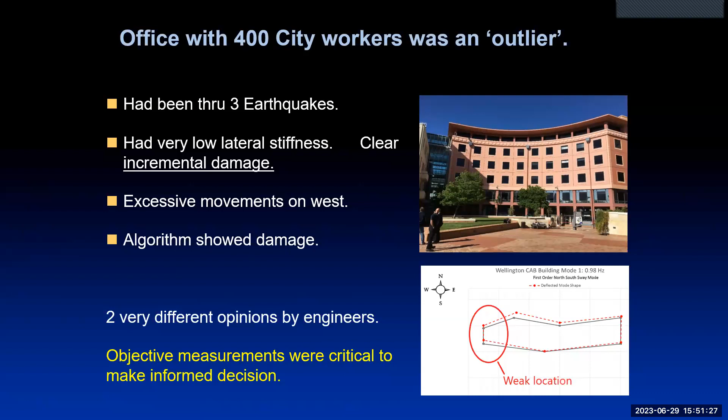From our measurements, we went to them and said it is 30%, and it's not in a safe condition. So they had a long discussion about what they were going to do with the building, but in the meantime, they took 400 workers out of that building while they were deciding what to do.

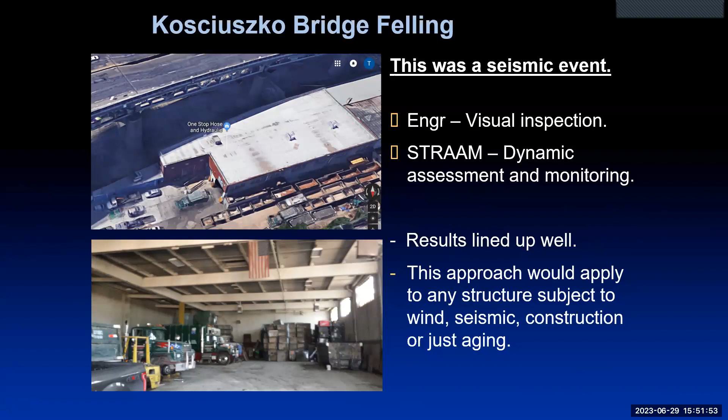We also had a look at this particular structure, a single-story building, and you can use these techniques in situ for load testing on this as well. In this particular case, the old Kosciuszko Bridge alongside the building represented for us a beautiful opportunity to create an earthquake for ourselves. So what we did was make an initial measurement on the structure and found there were certain weaknesses that we didn't like.

In particular, the roof of the structure. We found it bouncing, which meant that if a force came into the structure, it would be transmitted throughout the entire structure. We also found there was a weakness here, caused by a number of different things. So we measured the mode of vibration at 3.22 hertz, which is only 50% of what's normal.

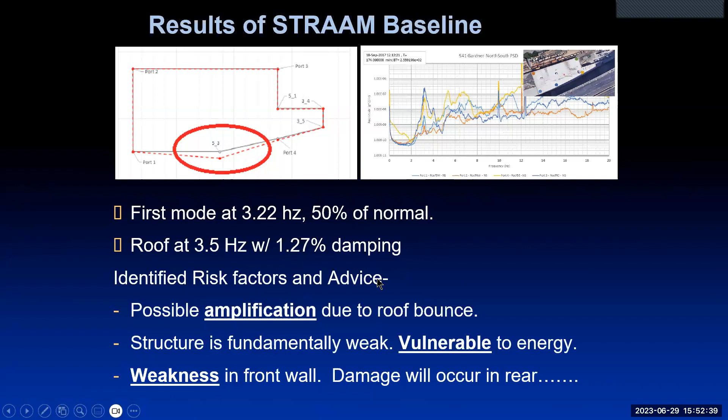That's a red flag. We also looked at the damping ratio and found that. So then the bridge was demolished, and we used that as an excitation mechanism. We had crack gauges on the back wall and found that some of them had increased. The engineer said there was no damage. However, when we looked, the frequency changed from 3.22 to 3.15, which means there was a 2% change in the frequency. That equates to 4% of stiffness lost.

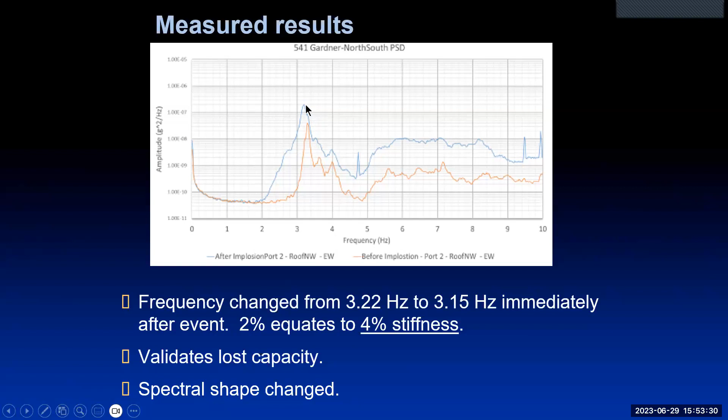But have a look at this: there's before and after. Before is this. After the event, the frequency has gone down, but the shape of the response has got larger. That only happens if damping has increased. So we measured damping using the random decrement, and found that the damping value had gone from 0.9% to 1.5%. So 1.5% means there are more elements in the structure that are dissipating energy.

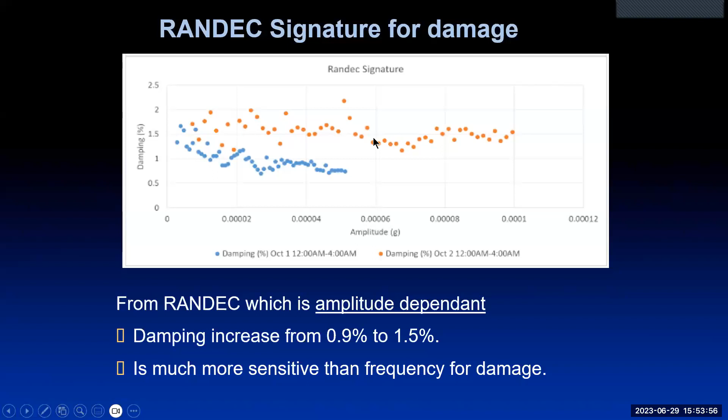When you put those together, what we found was that the risk ratio said, taking it to the end of the elastic limit, there would be a wind which occurs on average roughly once every 2.3 years. This also told us that the critical wind speed had reduced from a not very good 78 miles per hour to 66 miles per hour.

Alan, you have 5 minutes left. I don't know, okay, I am finishing up here now, Tom.

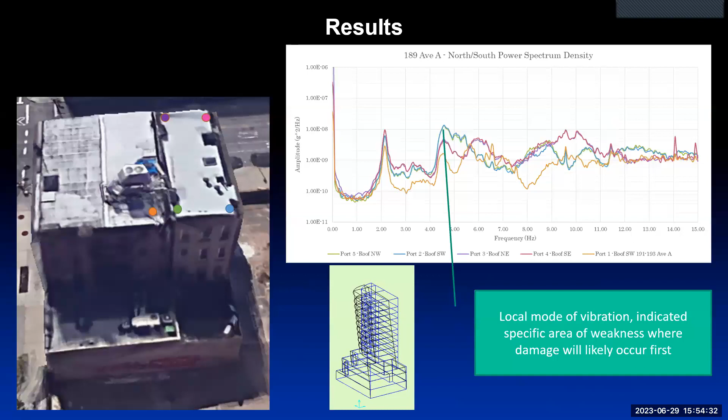I'm going to finish by the last two slides here saying, how do we measure that? We look at the mode shapes, the shapes we get of the distorted form of a structure. We look at the torsion and what's going on in that as well. You can see in this particular case, this building, that the torsional mode is offset, and this one is a combination of torsion and a more complex second order mode of vibration.

So why is it valuable? Limit liability, that's the first thing. Tom showed you that diagram where nobody's a winner, whereas in fact this is valuable because it's a due diligence step. It saves money and it adds liquidity.

It gives you a very early warning of whether you have a weak structure or not. It prioritizes budgets, because if you take measurements on a whole series of structures, you can pick out the really weak ones straight away, and you pick it up at a very early stage. You will find that what you've got is a way in which you can adjust your budgets to fix what is really a problem.

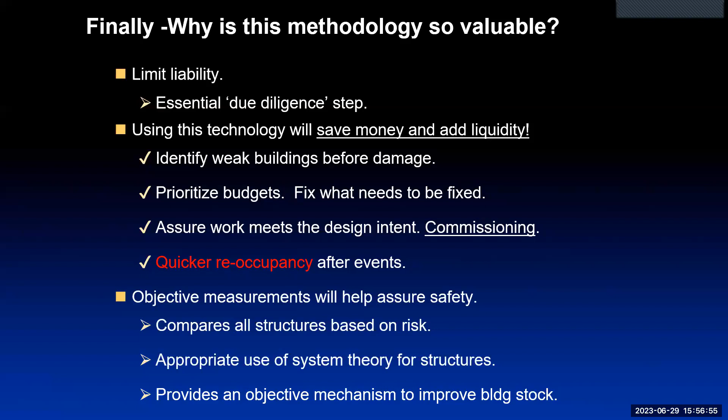So what we're doing here is comparing a structure based on risk, taking the same philosophy as we know and love is used in our codes of practice. And we apply fracture mechanics, system theory, and we have an objective mechanism to improve our building stock.